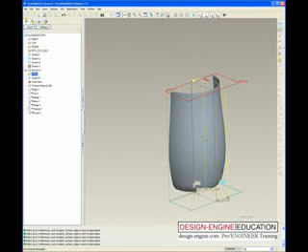I call these handles, and these handles help me control geometry in hindsight, which is what I call proving form in a 3D parametric package. So my final datum plane, I always build them in the same step too. I'll adjust the size of the datum plane so I like to leave a breadcrumb trail behind so that others can update or manage modifications to the model.

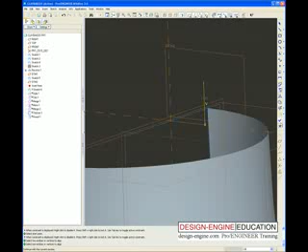Okay, I'll add another one here. Align it to the underlying structure there. Okay, now I've got what I call my parametric handle. I'm going to go ahead and color that green so that it can kind of stand out to others. Okay, so it's kind of a Design Engine characteristic there.

Now I get my style feature back, and I'm going to basically adjust my underlying geometry to sort of meet the style feature. Just kind of eye it some. Put it right about there. And then I'll raise this.

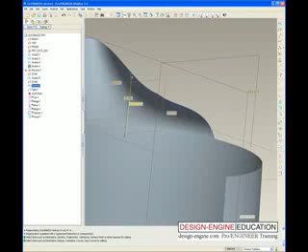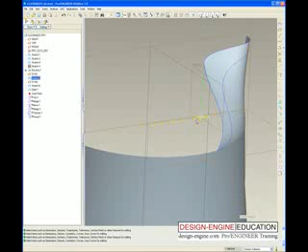Now I'm going to redefine my style feature and tell the style feature to adhere its parent-child relationship to the green handle. There you go. Now I'm going to modify the green handle to get it to behave. I'll take this one and move it back this way. Stretch it back a little bit.

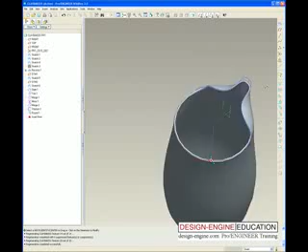Okay, so let's see if we can get our parametric handle to work now. Okay, let's see. I think if we want to close in this petal some, we could parametrically adjust this 0.5 to 0.3. Hit regenerate. Should close up our petal a little bit. Okay, so you get the idea how that works.

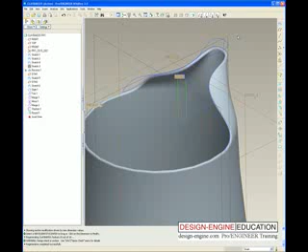Managing the parent-child constraints parametrically. Let's take this underlying handle here as well and grow that so you can see how it changes the diameter of the pitcher itself.